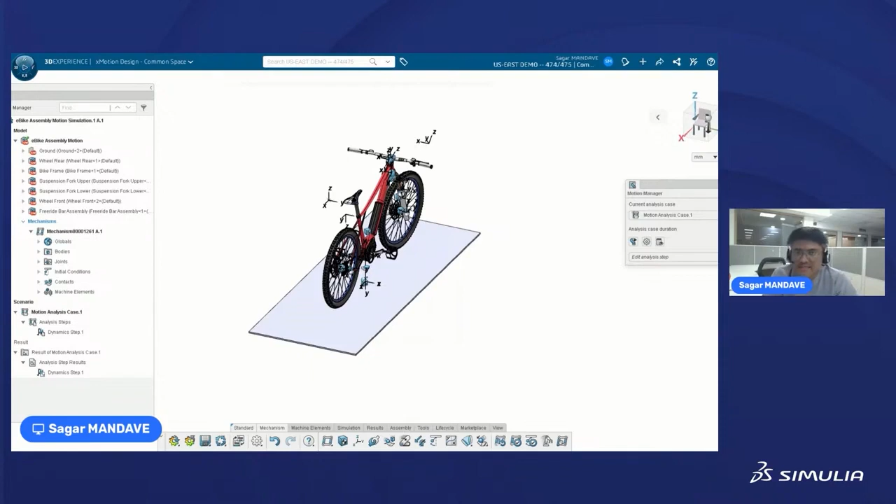Now let me take your attention to some of the basic things. Most important, when you import a physical product, XMotion will convert it into a mechanism. You need to then define the mechanism, mates, joints, and then you can set the analysis and run the analysis. Within the mechanism, you can add bodies, joints, contacts, springs, forces, or drivers, to make your assembly behave as it would in real life.

When you finish defining the mechanism, you can perform a dynamic or a kinematic analysis. So this is the high-level, helicopter view of the total motion simulation. Now let me explain what is there in this UI. So this worked on a SolidWorks part, right? So this doesn't have to be native 3DEXPERIENCE; this could be a SolidWorks part? Yeah, currently this is a SolidWorks part, a SolidWorks assembly, I would say.

So it is not having any mates over here, but if you used XDesign to design your assembly, XDesign is another web-based app where you can easily design your CAD. If you are using that app for your mechanism design, then it will directly import all the material and all the mates. So it will reduce your work in the XMotion Design app.

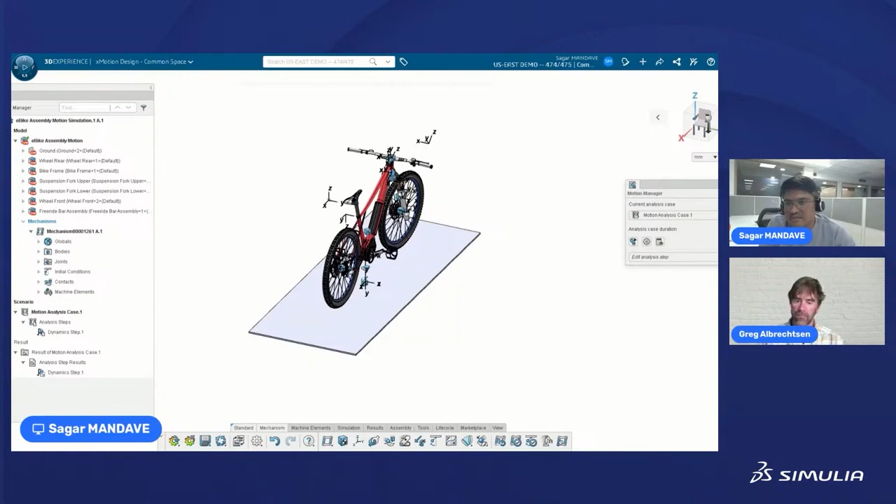I would like to take your attention to the left part, which is the design manager. The design manager stores and organizes study data in a tree structure. You have your physical product first, then the mechanism, then the scenario, analysis case, then your analysis step, and after that results are stored. From this structure you can easily access each body, joint, contact, or any feature of a mechanism.

Then in the bottom middle, you can see there is an action bar. Basically it's a group of available commands organized in tabs. Under mechanism you will see different commands where you can define joints, define markers, then initial conditions. You can run the mechanism just to make sure that every mate is defined properly.

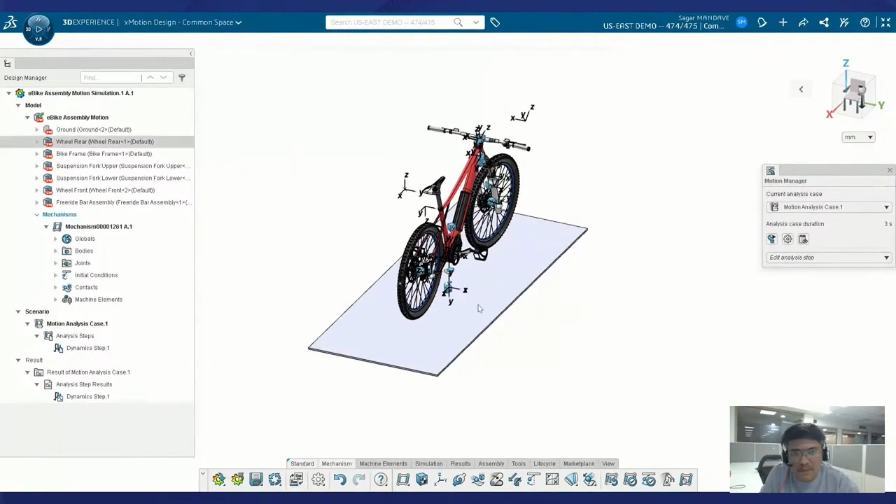You can even submit a run by hitting simulation if you are okay with all the things, all the mates, all the joints within the assembly. So this is particularly the main UI of the app, okay.

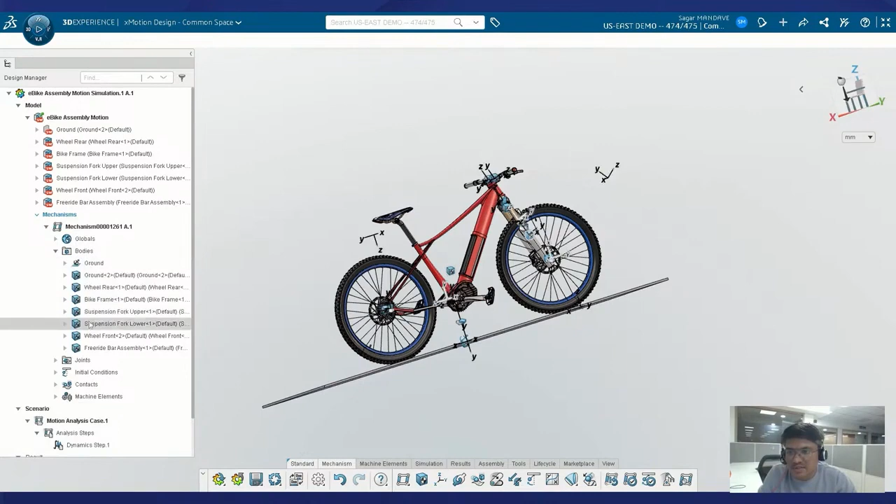Let me explain another very important thing: under mechanism you will see bodies, joints, initial conditions, contacts, machine elements. If I hit the bodies, you will see the geometry. If I select it, it will highlight the corresponding geometry, the corresponding physical product. And if you go inside it, you will find the markers. So these are the markers.

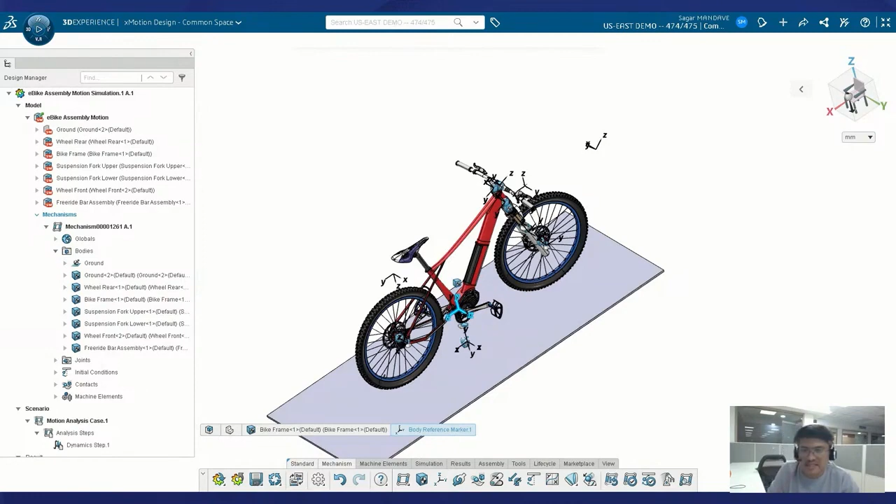You need to be very specific with the markers, because to define a joint, markers or bodies are both alternative options. But if you go with a marker, it will make your stuff very easy. It will be very clean and clear for you to understand how to set up the mechanism. So let's start with the actual.

So is that much different than just setting up assembly relationships? When I'm in 3DEXPERIENCE putting parts and components together, and I'm putting the wheel axle in the center of the fork, or the rear triangle, it looks like a pretty similar process.

Yes, exactly. In this particular app, you just need to make sure that the orientation of your marker is the same. I mean, the z-axis should be aligned with the z-axis of the other component involved in the joint. Okay. If it is not, then your assembly will be in a mess. It will automatically get rotated, and that's why you will see the trouble.

So you're doing this on a SolidWorks assembly that's brought in, and if I was to do this on a native 3DEXPERIENCE assembly, and I used assembly relationships as I'm putting that together, I could probably reuse a bunch of those, I imagine.

Yes, exactly. All the mates or interrelations will be directly transferred to the xMotion design. All the material will be transferred too. So there is an advantage. When your material and your joints, mates or interconnections get transferred to the xMotion design app,

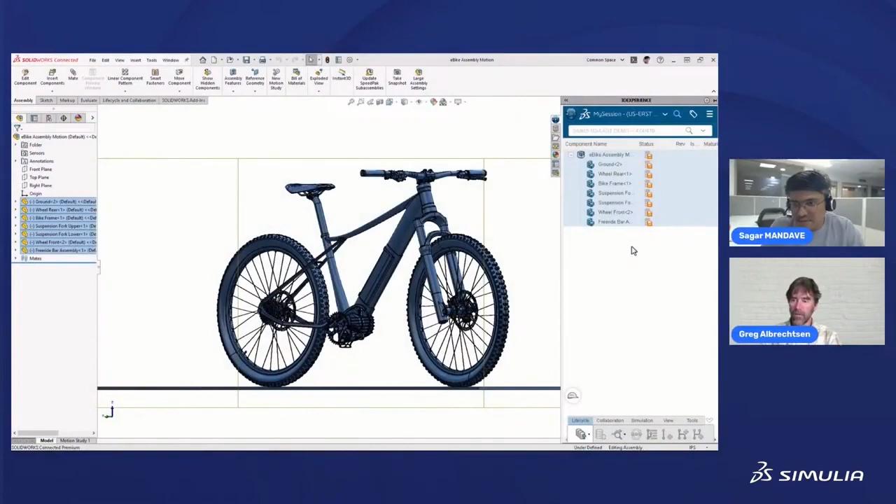the mass of that particular product, the center of mass, the inertial properties, and whether that body is fixed or free to move in the mechanism will be automatically identified. So that's the advantage of using native 3DEXPERIENCE geometry. Cool. Yeah, so let me see what happens. Okay.

So when you import a SolidWorks geometry, a SolidWorks assembly, the most important thing: to run a motion simulation, it is mandatory that you have an assembly. You cannot import a part into xMotion and then try to work on the mechanism for that particular part. A single part cannot form a joint or a mechanism. So make sure that you are importing an assembly in the first place.

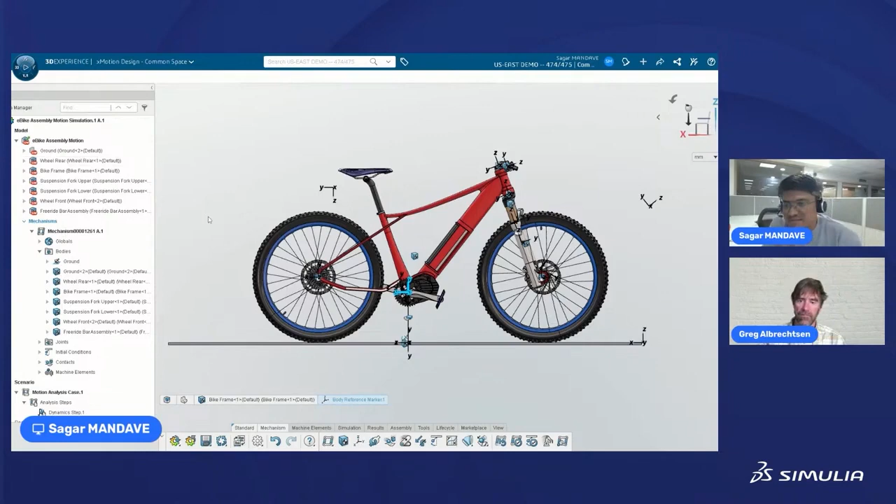So right now I have imported the e-bike assembly, and essentially this is not an actual type of mechanism. I'm simulating this just to have a motion simulation, motion between the suspension forks. That's why I have imported this assembly. Right now I have ground as a part.

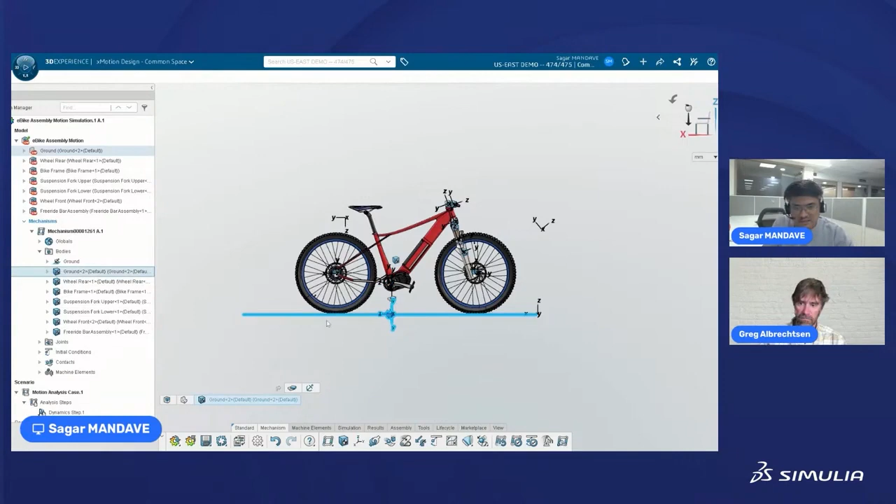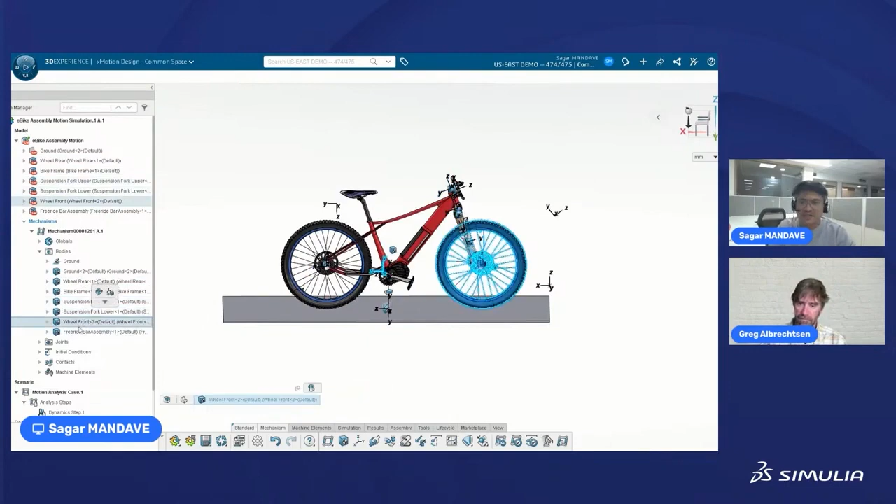I will drop this cycle from some height, and then it will bounce back as the suspension forks are there. Then I have the rear wheel, bike frame, suspension fork, upper suspension fork, lower suspension fork, front wheel, and the handlebar or Freeride bar.

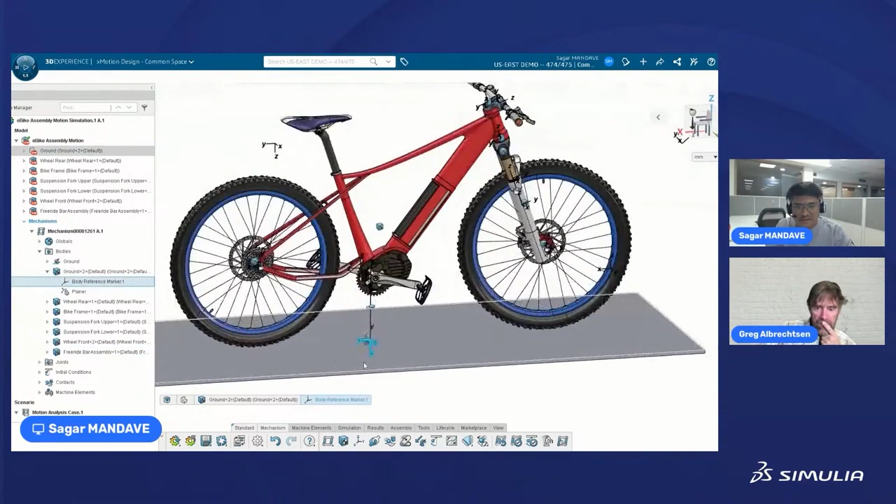Right now, if you observe these XYZ component coordinate systems, these are nothing but the markers. Originally, with the body, markers are nothing but the coordinate system associated with your particular product or object.

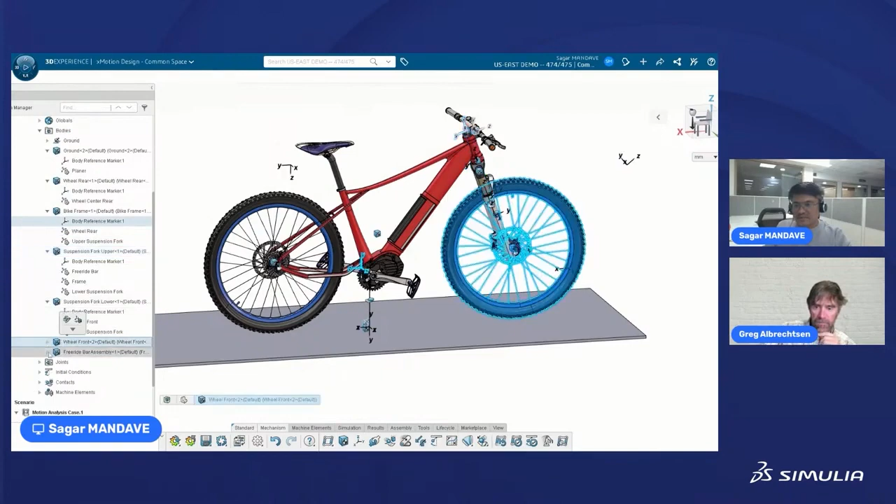Here, as I import the assembly with this physical product, the ground, the body reference marker is already there, and I have defined this one for my mechanism to make it very smooth and behave as I expect. That's why you can see several markers; you can create several markers inside the body to define a joint properly.

Now you can go to the model assembly or the products, where you can click on a particular part, and you can unhide it or hide it. Then you just need to go to the mechanism tab, and there is a command called marker.

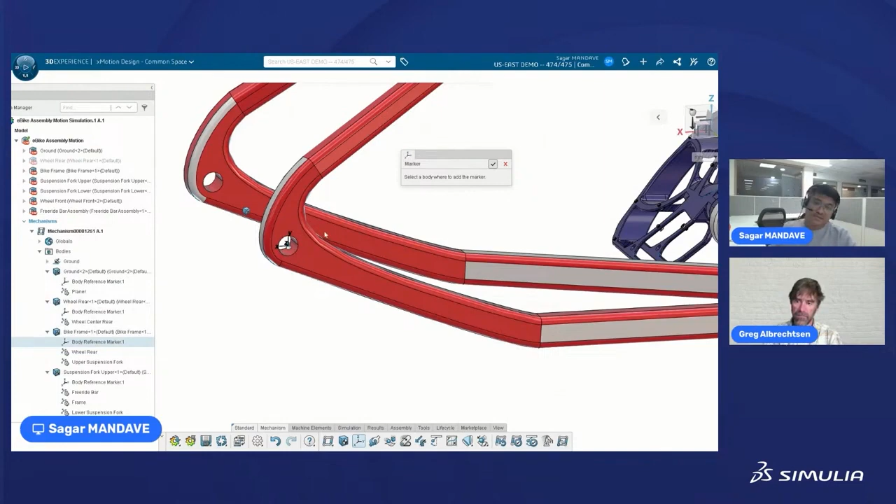You can click on that. A message or a window will open where you need to select the body where to add the marker. So body section is this one. Right now I'm interested in adding marker to this frame. So I'm selecting e-bike frame, and then it will again ask you for manual and by geometry. So it's easy to go with this option, by geometry.

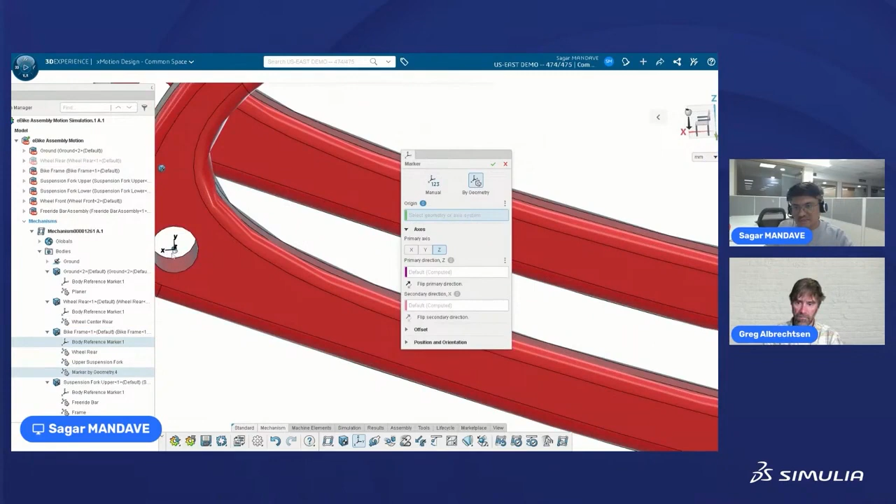So I will select this one, and then you can see where to place the origin. I will be interested in this particular region, so I'm using this edge. So you can see here that the marker is there, right? But the orientation is not as expected. I mean, the original x is in this direction, and right now my x is directing upward, so I need to move it. So if you closely observe, there are these circles or arrows which allow you to rotate it.

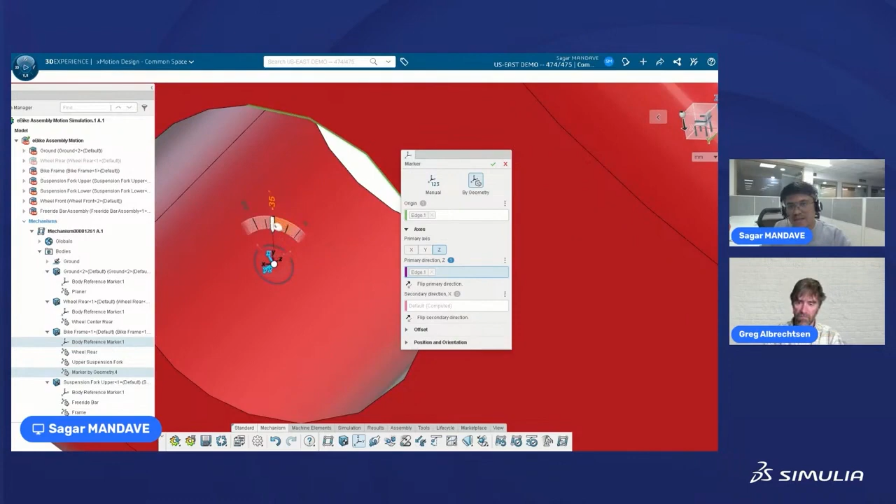And when you bring your arrow in the white circle, you will get the actual angles. So I'm rotating it by 90. So now x is aligned, but z and y are not aligned. So here again there is an option, flip primary direction. If I flip it, now you can see that x, y, z components are aligned. So this is the way you have to define the marker.

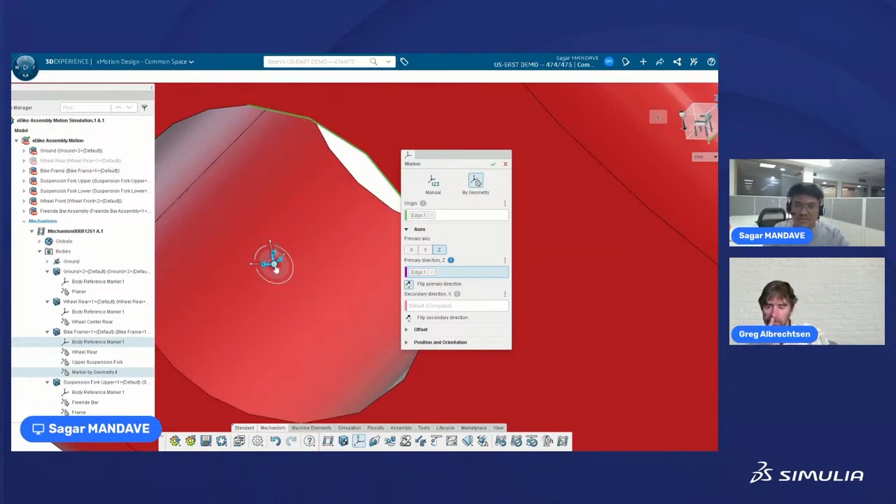So right now the original marker was of the wheel, which is in the same orientation of the e-bike frame, where the rear wheel is joined. So if you hit this one, then there will be a marker added under the e-bike frame. So this is the latest one. And if you want to edit it, just click on it. There is an option, edit feature, and you can go to the dialog box where you can edit the orientation and everything.

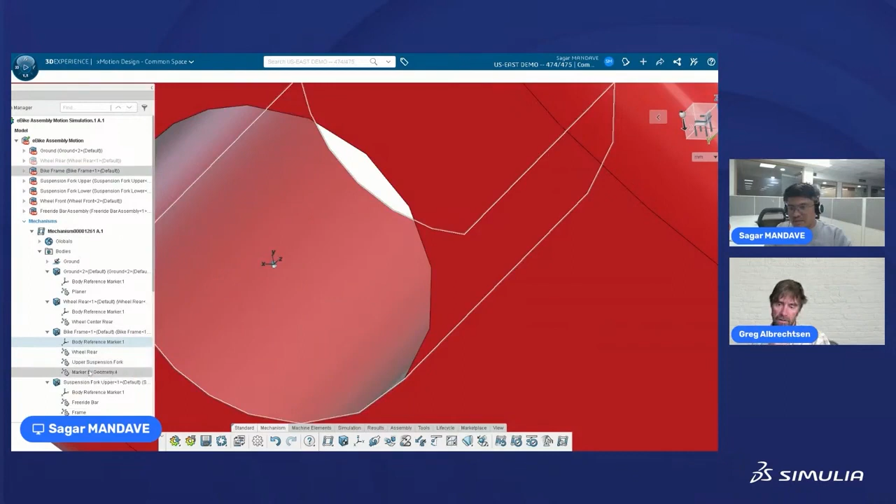One more thing, under this, you can easily delete it or deactivate it. We prefer to deactivate it, not to delete, because in future you might need that particular marker to define a proper mechanism. So both the options are there.

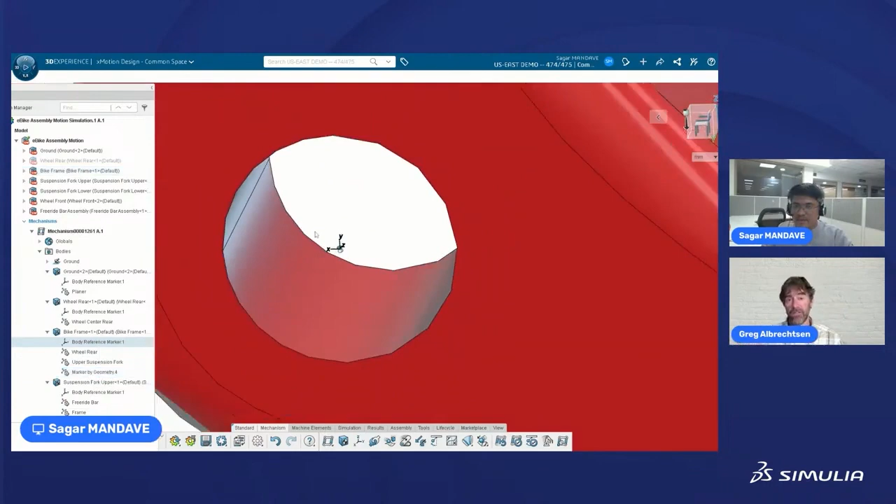And now, I assume the purpose behind having these markers is when you start to define the mechanism relations, you need some vectors or some planes so that you can define angles and things like that, so that you actually have these markers. So when you set up the mechanism relationships, you have something to actually point to? Yes, exactly. You got it right.

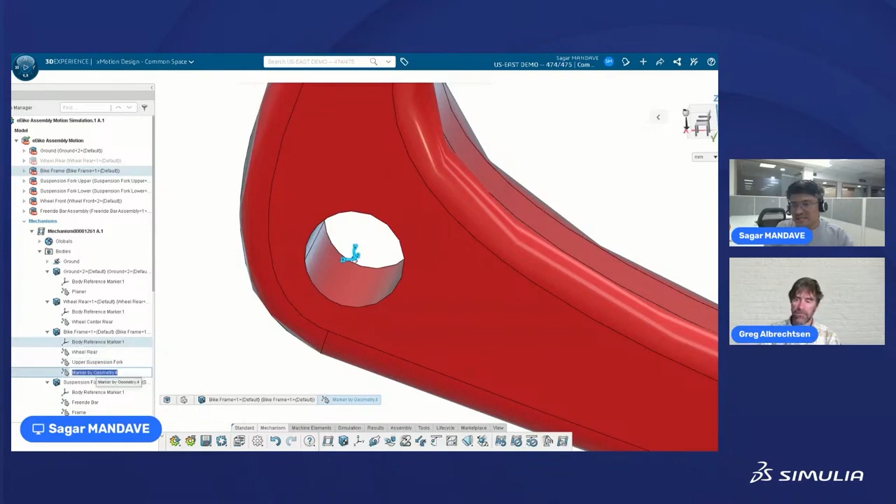Additionally, now the name of this marker is marker by geometry point 4, but here you can see the wheel rear, upper suspension fork. So easily you can edit the name of this as per your convenience. Under this body, marker by geometry point 4 will be there. If you add a fourth marker under any other body, right now suspension fork upper is having three markers, if I add a fourth one, then the name of that fourth and this fourth will be the same. So just to avoid confusion, you can rename it as per your convenience.

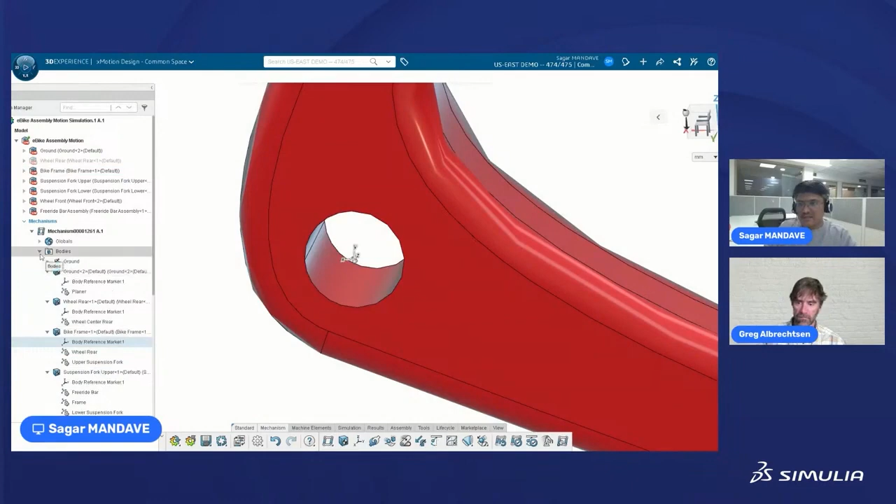Cool. So right now I will be deleting this. So this is how you create the markers on the body. So now we are done with the marker. Once you finish with your marker, right now I have hidden the rear wheel assembly. I will unhide it, and once you refresh it, it will be back in the right position.

I will not do that now, but after that, when you come to design a joint, under mechanism, next to markers there is a joint command, and when you open the joint, you will see several types of joints. So fixed, rigid, revolute, prismatic, screw joint, cylindrical, universal joint, planar joint, spherical joints. So most types of joints are covered in the XMotion Design app. So any mechanism you can easily simulate using the XMotion Design app, as we have a wide range of joints.

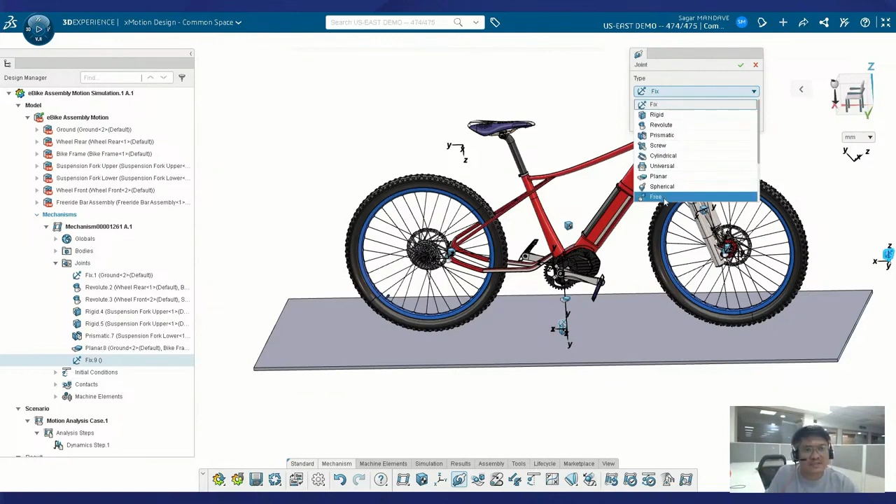So now my intention is to drop the bicycle on this floor as a ground. So I wanted to fix the ground. So I have used joint fix on the ground.

Then obviously there will be a revolute joint between the rear wheel and the frame, and then the front wheel and the lower part of the fork. So I have defined a revolute joint between these two. So let me show you how you can define a revolute or any kind of joint.

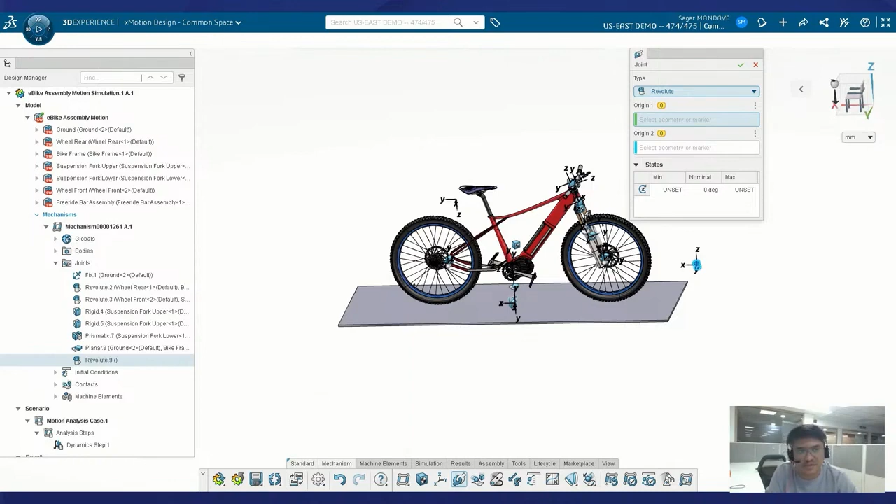So simply go to the joint command and select whatever joint you are interested in. Then it will ask you for the first geometry or marker, then the second geometry or marker. This is where markers play a very important role. So let's say I want to select a marker of the rear wheel. I have created rear wheel centers just for my convenience.

So I'm selecting this, and the second part will be where you are going to join that particular component or part. I'm going to join it to the bike frame, and I have created a marker for the rear wheel. So I will select it, and it will appear over there.

Even you can freeze the degree of motion, I mean, by how much angle it should revolve. You can set minimum and maximum values over here, and by simply clicking on the OK button, that joint will be defined. So similarly, you can define whatever joints you want to have in your mechanism.

So we discussed joints. Then regarding initial condition, before that, let me talk about contacts. Contact will help you identify which parts are contacting each other in the mechanism. You can simply click on this 3D contact command. You will see that you can create one list or two lists.

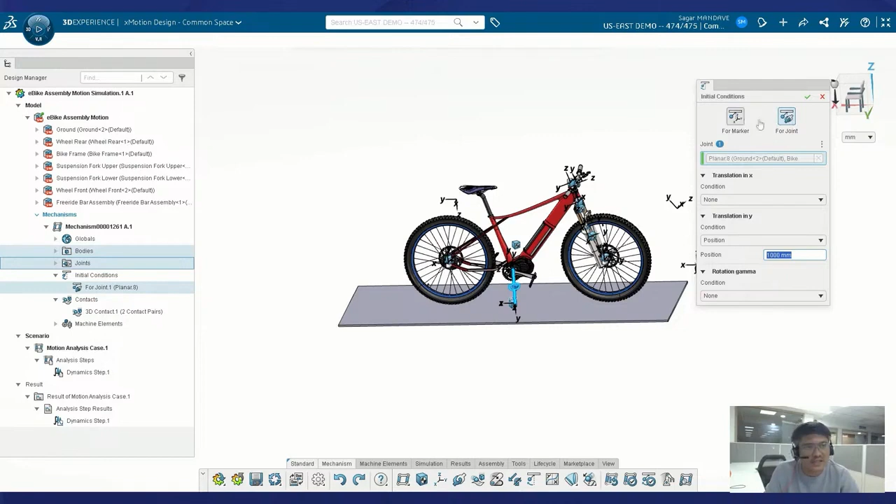I have selected a planar joint, which will give me a position. I have defined a position of 1000 mm. I'm dropping this e-bike from 1000 mm height so that it can hit the ground and bounce back.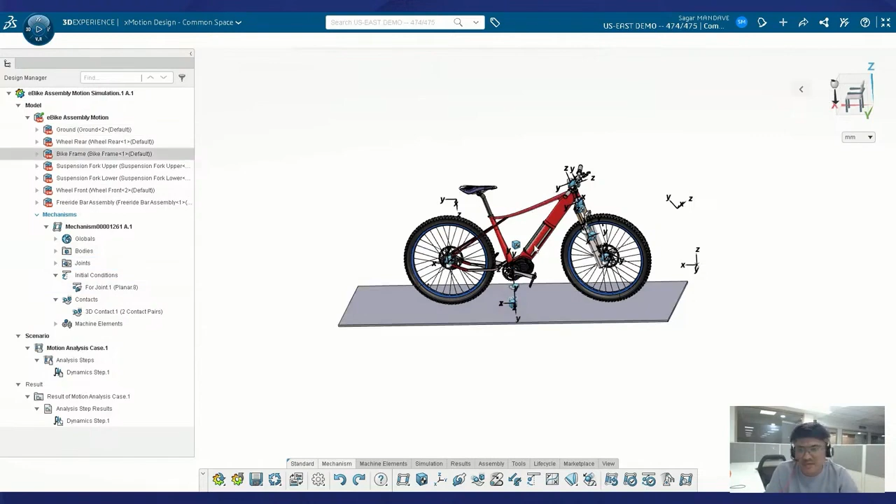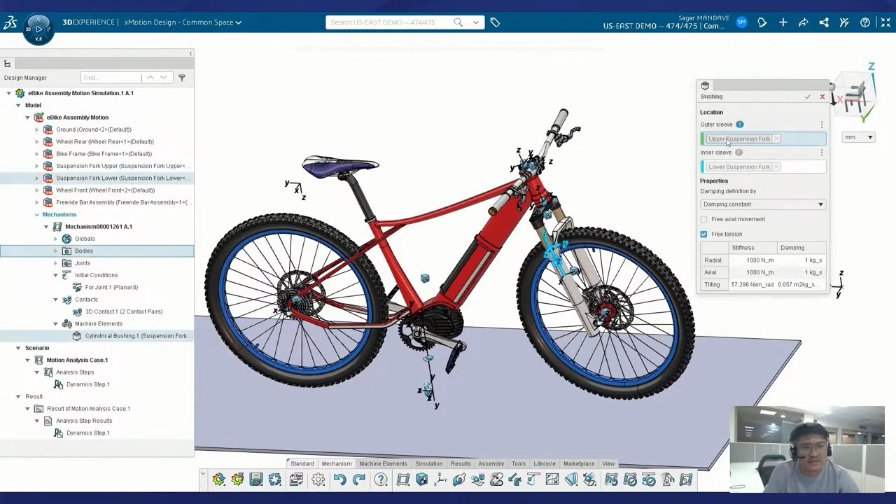After that, in this particular assembly, you will observe that there is a suspension fork, and suspension forks should have either a bushing or a spring. So I have defined dampers. To define the dampers, we have a cylindrical bushing. Here you can select the outer sleeve and inner sleeve to define the damper or suspension.

For damping, you can assign a percentage of stiffness, or if you want constant damping, you can choose this. Then there can be free axial movement or free torsional movement, and accordingly you can have stiffness and damping. The shock absorbers have stiffness as well as a damping coefficient.

So you can add both the values for radial and axial. I have checked free torsion, that's why torsion is not there, but if you uncheck it, the torsion will be there. So all these stiffness related and damping related values can be used for your shock absorber, and you can define that in your assembly as well.

That's pretty cool. As a mountain biker myself, that's so important, to be able to fine tune a lot of those details for sure.

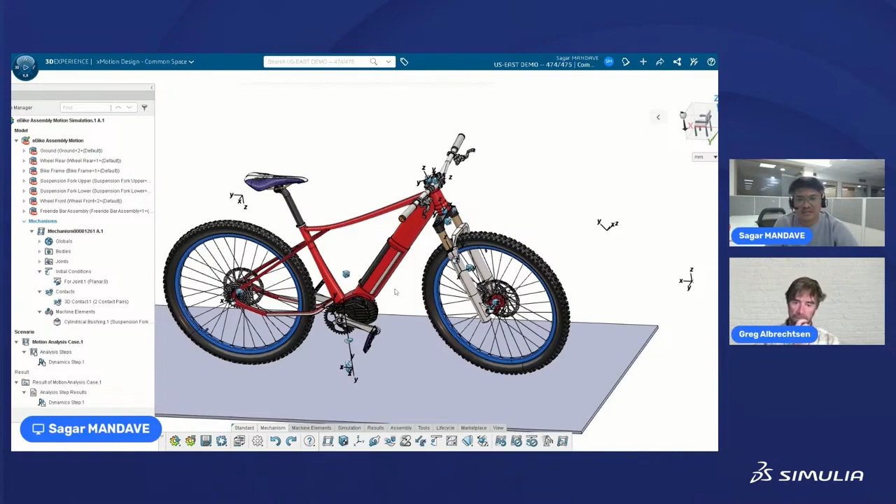Yes, so these are the things you can easily do, and most importantly, in other simulations, for structural simulation, I think there is a model check thing or scenario check thing.

So just like that, we are having mechanism solve here. So once you are done with markers and defining joints, you can go to the mechanism solve, run the mechanism. If it is working fine, then you can go ahead and define the initial conditions, contacts, machine elements, or any load on a particular component of your mechanism.

So just to have other components added, and to have a dynamic analysis of the whole mechanism, you can add mechanism solve. You can check mechanism solve and add those things.

So under machine element, using machine element only, I have defined bushings. But if your mechanism has springs, you can surely go for this option as well.

After doing this, you can create an analysis case and analysis step. In a particular mechanism, there can be several analysis cases, and in an analysis case there can be several steps. So in a single mechanism you can have different motion analysis cases. Right now I just have one motion analysis case, but under scenario you will find if you have created different analysis cases there.

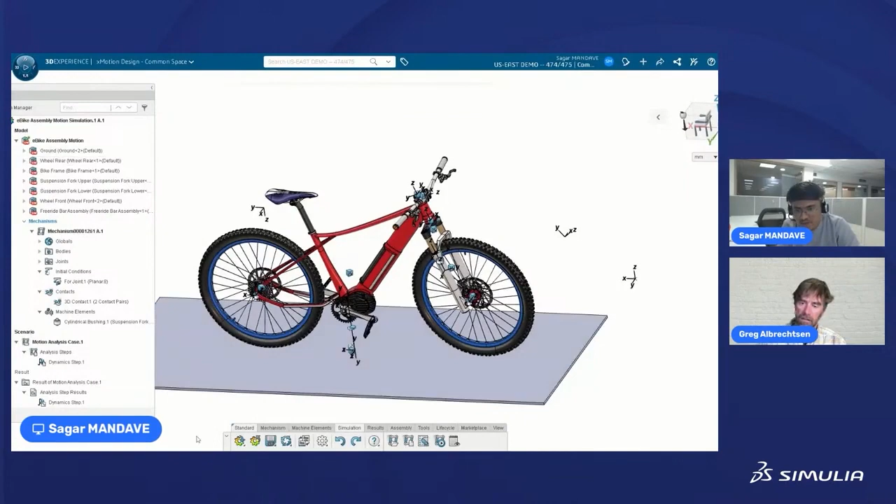Oh, it is there, but I was not able to show it. That's why we do live, right? It's always fun when it's live. I think everybody's been through this before, trying to give a presentation somewhere, and at least your computer's still up and running, so that's a good thing.

So this is the... it will take some time to open. So till then, I have a few things to talk about.

In the XMotion design app, kinematics and dynamic analysis steps and cases are there. Kinematics is basically focused on movements where forces and moments will be ignored. In dynamic steps, the solver will consider movement caused by any force or moment. So in kinematics, motion drivers control the mechanism, but in dynamics, motion drivers plus springs, gravity, force, torque, or inertial effects will be controlling the mechanism. That's the difference between kinematic and dynamic steps.

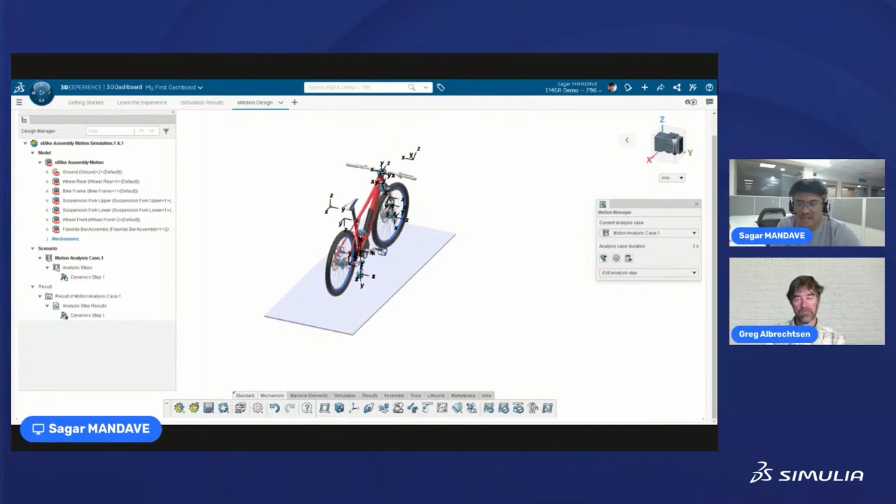So you are equipped with both analysis steps, and depending on your end expectations, you can choose which step to add in your simulation. So this is the solved simulation. Let me play the result for you guys.

So as I said, I'm dropping it from a certain height. You can play it on loop and observe how things are changing. You can clearly see that the suspension system is moving right away. You can change the stiffness and damping coefficient of it, and have a design variation at your end.

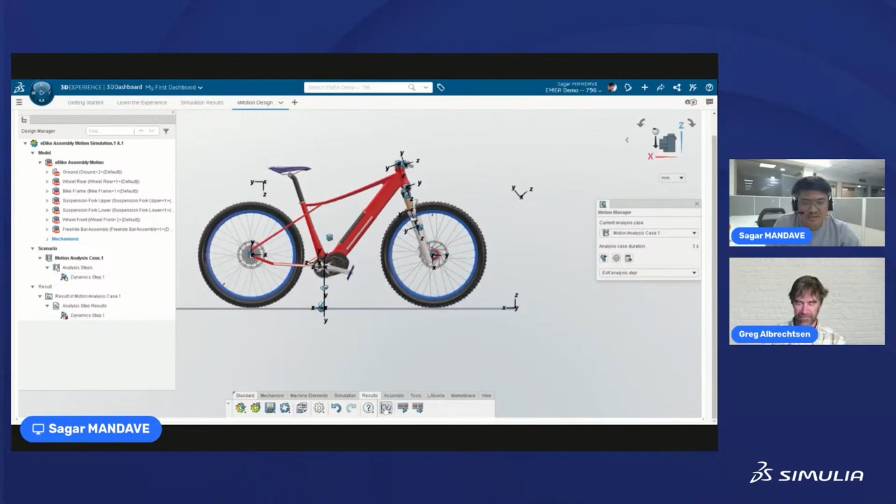And analyze the motion simulation of it. As a result, you will get animation as well as 2D plots. For 2D plots, you can choose whichever dynamic step you are interested in, and then an element - on body, on a particular joint, or on a contact, or any machine element.

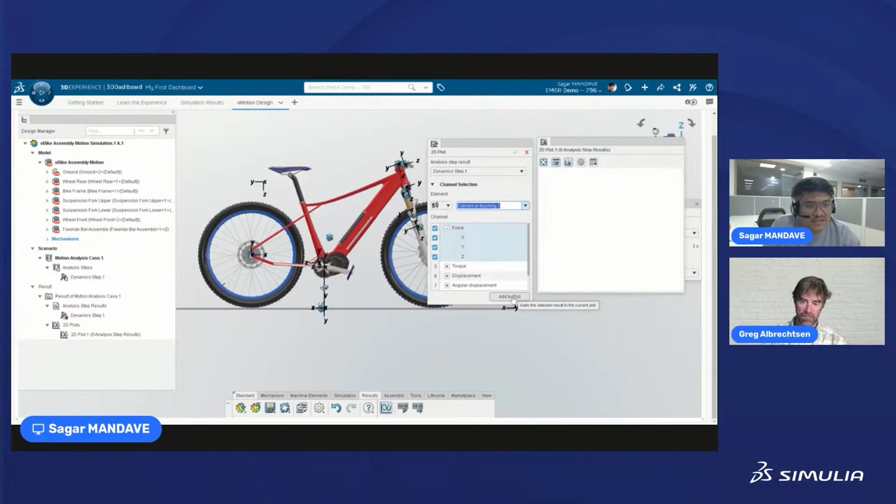So let's say now I'm interested in that suspension fork. I will be choosing machine element, and it will show you what kind of machine elements are there. I have only one cylindrical bushing, so I'm selecting that, and it is asking what you are expecting - force or torque, displacement or angular displacement, velocity or angular velocity. Right now, let's say I'm expecting force output on the cylindrical bushing in XYZ direction. So go ahead and hit add to plot, and you will see that plot here.

So that's the force on the bushing from the drop. Initially, when it was releasing until it hit the ground, it was decreasing, and then the actual functioning of that cylinder suspension fork starts, and the forces are there.

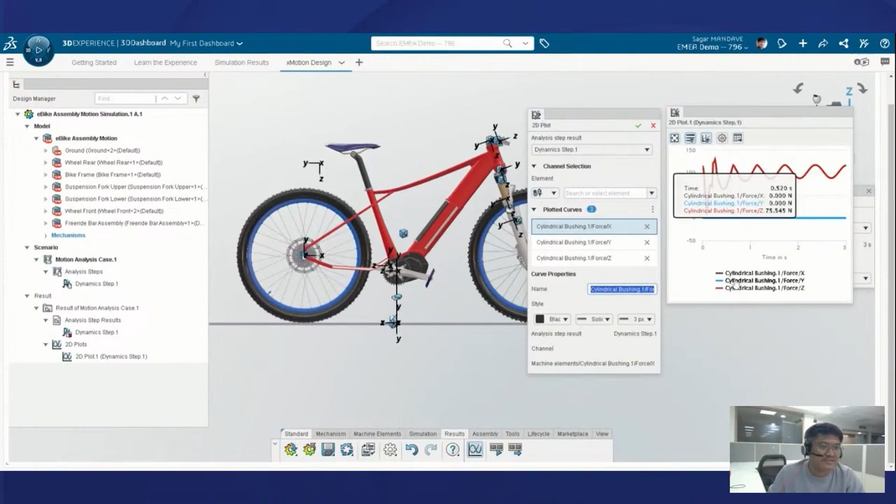At the same time, you will see different color codes. In the y direction, the force is 0. With the color contours, you can identify which one is the required force for your mechanism, and accordingly you can design your particular mechanism, or that part, or the component, or the joint.

Yeah, so that's it from my side on motion simulation.

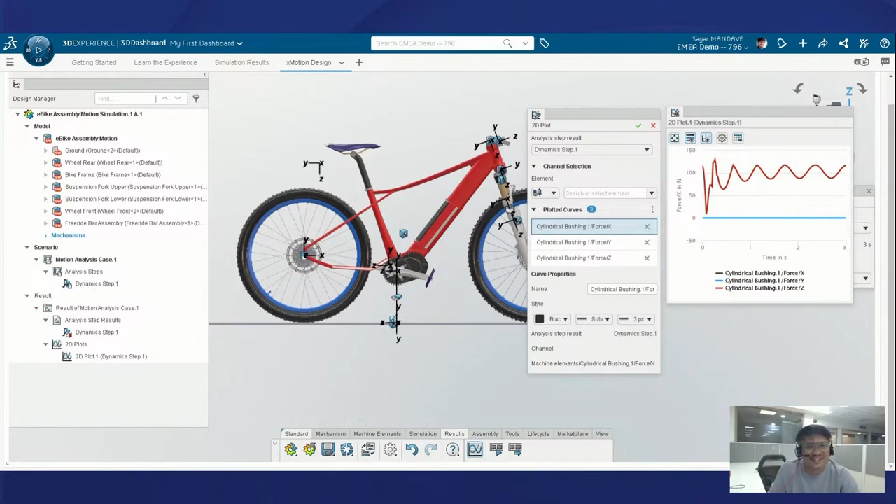Wow, so that's pretty awesome because that really shows how the dampening is taking vibrations out. Is this something that you can then export these forces and put into an FEA based simulation and get all your true stresses out? Yeah, so you mean the actual stress induced due to mechanism on a particular part or at a particular surface?

Yeah, so now that we have this force loading, can we put that into some of our other simulations? I think that's my future step to learn if that's possible, and if we can do that. Right now I'm not aware of that, but I'm sure there is a way, and that should be included in the tool. But I need to explore that. I would imagine if we could even just capture this in an Excel spreadsheet or something, then I could bring that into a simulation. Yeah, that's possible. You can export the result, but let me show you how you can export it.